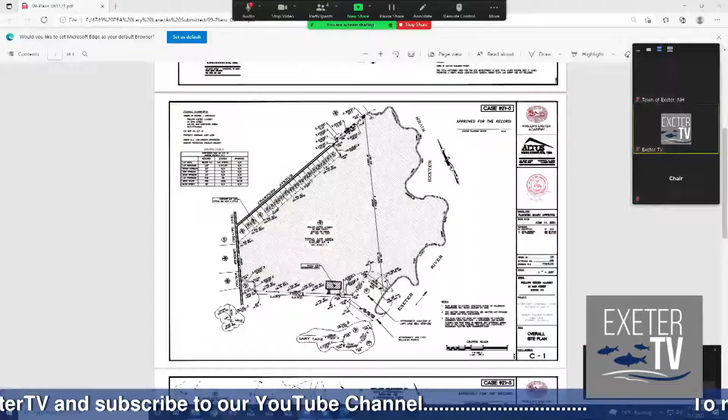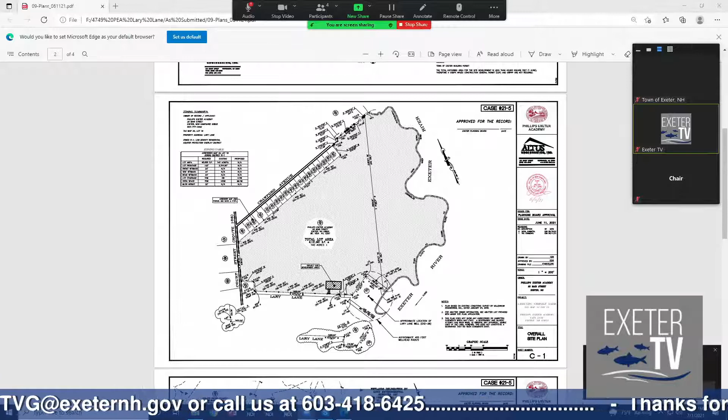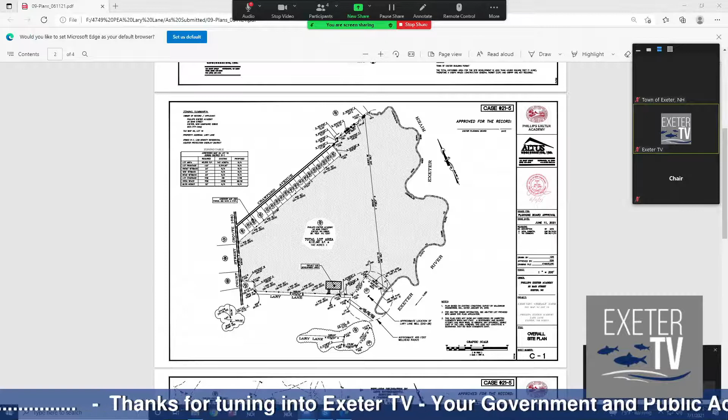Dave gave a pretty good summary of the project. This is a parcel on Lary Lane, about 140.5 acres. You can see from the map shown on the screen, it's quite a large parcel. In the southern portion of the lot, we're proposing to construct a 31,000 square foot gravel storage area for material storage to support construction activities on the Phillips Exeter Academy campus. This lot is primarily undeveloped, a wooded lot with a mixture of uplands and wetlands. The area where the gravel lot will be installed is about a 2-acre area that was selectively cleared in 2018, so it'll be constructed within that area.

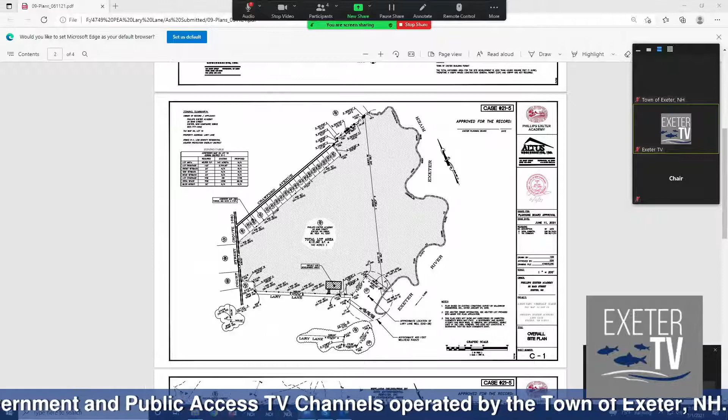The stumps are still there. Only the stumps within the footprint of the gravel lot will be removed. The remaining stumps and surrounding area will be unmaintained and left to continue to regrow, so we're only focusing on the limits within the gravel lot.

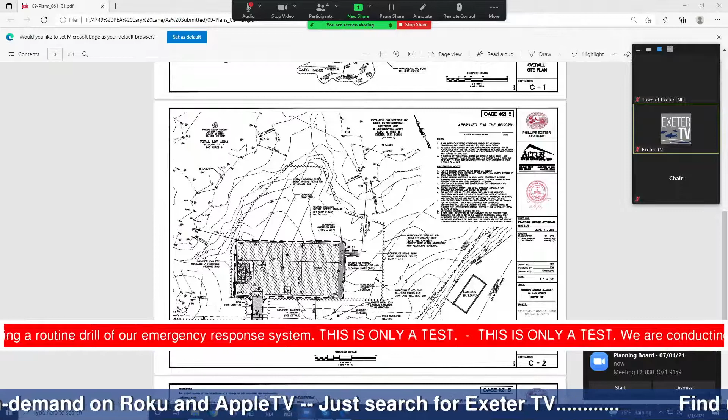Approximately 10 acres of the 140 acre lot were surveyed and wetlands mapped back in 2016. This year, just a month ago, Gove Environmental Services went back out and reconfirmed the wetlands boundaries, which was brought up at technical review. So they confirmed the wetland delineation for the project.

As you may also be aware, in 2018 there was a LOMR that was prepared for the dam removal on the Exeter River. So the floodplain in this area actually went down approximately 3 feet in elevation. So there's no floodplain within—I believe it is still on the parcel, but nowhere near the project site.

The proposed project, as we said, will be approximately 31,000 square feet. It's 0.5% of the total lot.

As a requirement for the site plan review, we did prepare a drainage analysis for the project. We'll be installing on the eastern side of the lot. The lot was designed to slope grade, high side on the west, on the left, grading to the east. We have a sediment forebay to collect any runoff for pretreatment. We'll then overflow to a level spreader and then the 150-foot undisturbed wetland buffer for treatment of the stormwater runoff.

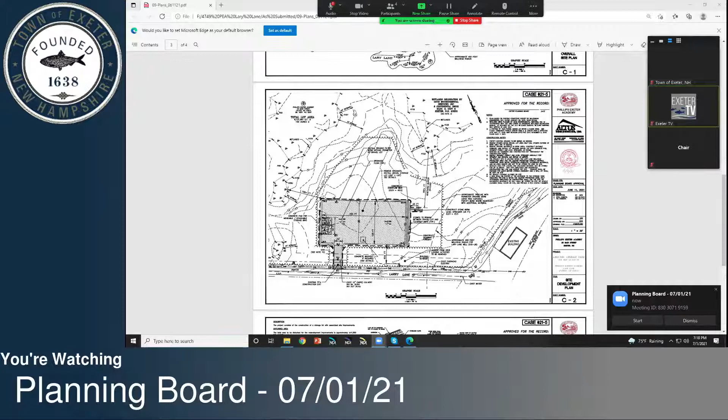And the analysis did show there's no impacts from pre to post conditions. So there's no increase in runoff as a result of the project.

We also prepared a stormwater operations and maintenance manual that was provided with the application. And as David mentioned, there's a waiver request for the performance and maintenance guarantee. I think Phillips Exeter Academy has a standing reputation within the town—they're not going to walk away from a project, so that's one of the reasons that was requested.

There have been a number of measures taken to prevent any infiltration of water that might have contamination associated with it on the storage lot. There will be some infiltration very slowly through the clay, but because it's clay and/or silt, it's going to be a very slow travel time. The stormwater management will funnel the water into a treatment area where sediment will drop out, which will also help attenuate any nutrients that might have run off with the stormwater.

There's also measures that are going to be taken on what can be stored there, and nothing that's included in the prohibited list in the Aquifer Protection District will be stored there. And that's not only listed in the report that I did, but it's in the stormwater manual. So it'll be very clear to all the folks using that storage area that those materials are not allowed to be stored there.

So in particular, no petroleum, fertilizer, herbicide, pesticide, or other hazardous materials. No vehicle repairs or other motorized equipment will be completed at the site. No de-icing chemicals or snow removed from off-site sources will be stored at the site. So that'll protect against chloride, road salt impacts, and hazardous waste impacts.

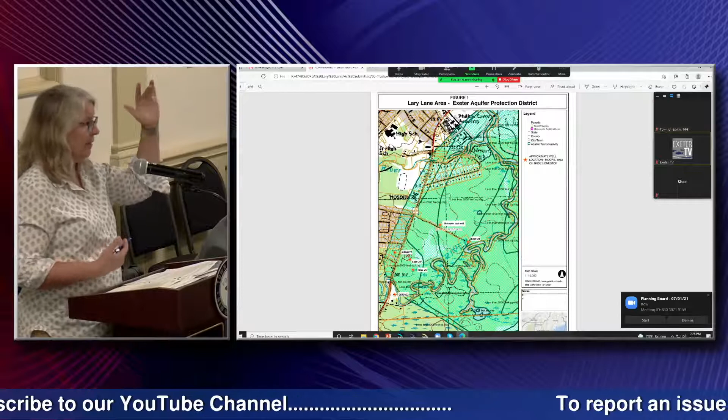So it should be clear to the users what is and is not allowed. And the other thing that I think is going to be posted is there's going to be a sign that's specific to what can be used and stored at the site. Is that still in the plan? Yes. Okay.

So, in summary, I think PEA has done a really good job of assuring that there's going to be no impact to the surface water or underlying gravel and sand resources and the water supply in the area. So I'd be happy to answer any questions. John?

Forgive my ignorance on the water system, but that well services the neighborhood? It's one of the Town of Exeter water supply wells, and so it probably services a fairly large area. Plus, there's now a water treatment plant there, so water from that well, and I believe one other, is treated there. It's basically that end of town or something that they're... I think probably best to get the water department to give you that information, but I think it's pretty well integrated throughout the area. But do you have any knowledge of that?

Yeah, it's part of the groundwater treatment plant that's at the end of Lary Lane. So there's a well there, right? And then there's a well at Gilman Park, and then there's another well actually on Academy property by the stadium, called the Stadium Well. So I believe there's three wells that come to that groundwater treatment plant and get into the water distribution system. Yeah, so I think so.

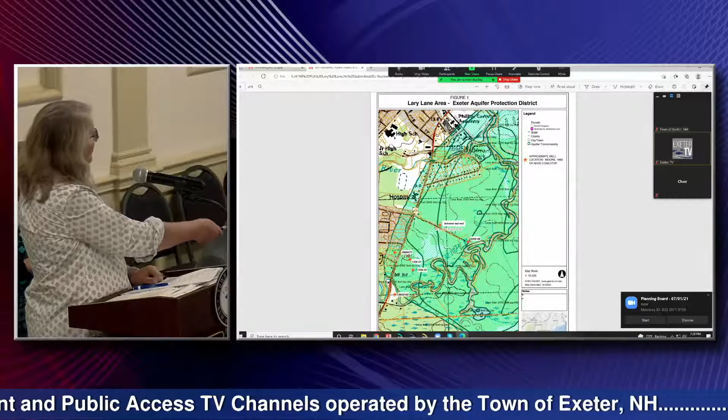It does. So if you look at the map I have up there, Exeter River is the very squiggly line there in the middle. That's the wiggly line. And then Lary Lane is right in the center of that. Thank you. Right, that's more helpful. Okay, here's our squiggly Exeter River flowing this way, and then here's Lary Lane. The Lary Lane well is here. Right, the storage area is right here.

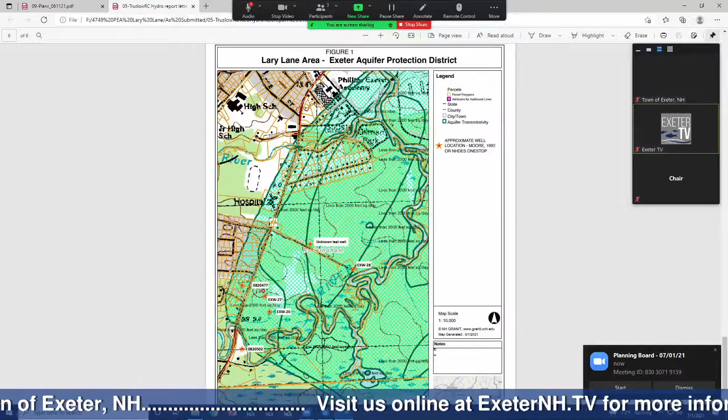The other wells that I have listed here are southwest of the Lary Lane well, and they also have that significant depth of clay. So the typical depth of clay here is going to decrease somewhat going to the southwest, but it's still going to be significant in this area surrounding the storage yard.

Does that answer your question? Well, I'll get the answer as to where the wells go from someone else.

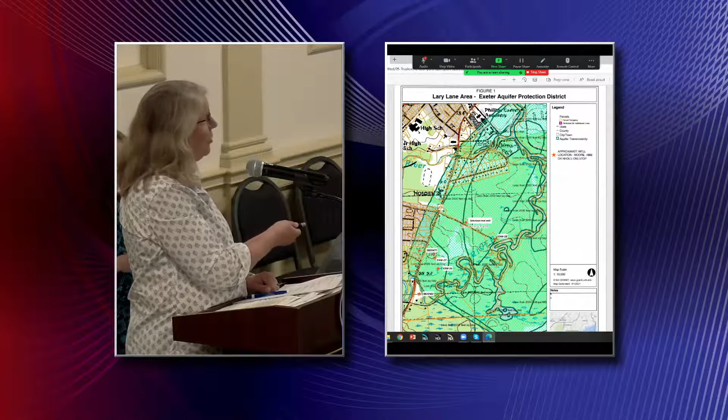I'm just curious, it sounds like we have 3 or 4 wells. So here's the Lary Lane well, and I think the stadium well is right here. That's the Gilman Park well. Stadium well's right across the river. So these all now, I believe, come to the Lary Lane water treatment plant and go through treatment for mostly metals and then distributed through the system.

I'll get the answer from the water department. I'm just curious as to how far that goes. It doesn't go to the east side of town, but it's at that neighborhood, south of the academy.

One more? Sure, go ahead. The site we said was cleared in 2018, and there's a big pile of loam there now. Is that from the field that they just stored it there?

That's actually from the construction site with the new dorm that we're building. That was transported over there, which I guess the first intent of this area would be used for that project to temporarily store that loam. That topsoil will disappear, go back to that site. So it's temporarily being stored there, but nothing was disturbed. None of the existing area was disturbed in order to stockpile that. So it's pretty clear what's cleared out where it's going to be makes sense. That's the area that we would like to develop to the gravel storage lot.

Thank you. The Academy moves a lot of soil here and there around town, when the need arises. Anybody else? Any other questions?

Pete has a question. I may have missed this, but is it proposed to monitor this site at all? In other words, once you have everything down there, will there be folks who occasionally go and see that nothing has gone awry?

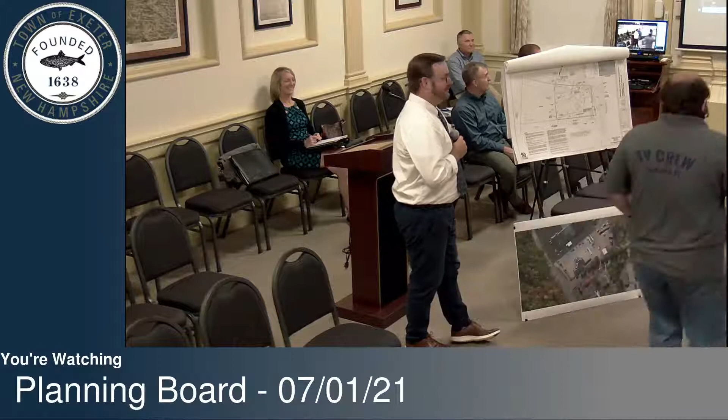So from a demolition point of view—oh, now wait. If you didn't hear me the first time, these problems with Zoom. I'm sorry, this is a test. They'll fix it. Test, test. Okay, all right, we're back.

So what you're looking at here now is the demolition plan. There's an existing fence line that runs along the property line between the two parcels, depicted by the difference in pavement color. The existing lease line for this development is really the front portion of the site, about a 78,000 square foot portion of land. We're not touching the rear, approximately 80,000 square feet. There's a chain link fence running along the south and also along the western portion, giving a good delineation of the limits of work for the development.

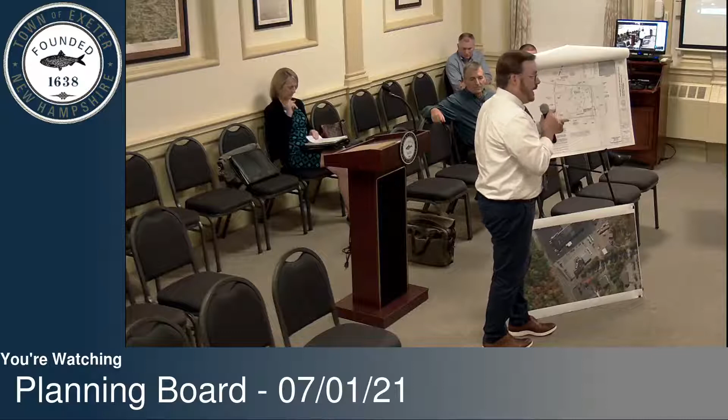Everything you see out there today will be removed—the building, all the pavement, and the curb cuts are getting reduced. All the utilities will be disconnected, and we'll try to maintain those same connection points during the proposed development where applicable.

Can I ask you real quick—can you show me where the line on the west side is? Is it right there? Yep, there's an existing fence line, barely visible on the aerial, but it's right here.

And out there today, there are actually a couple of dumpsters in the back—that's really the limits of what's out there. The firewood operation is on the other side of the fence, in the rear, and none of that firewood operation is being touched as part of this.

There were some discussions as part of the TRC regarding when that development was done and whether it needs to be included as part of this development, since it is all one lot, and whether we need to file a conditional use permit, et cetera.

Just to give a little history on that: the representative from NHDES, as well as Doug Eastman and Kristen Murphy, went out on site and determined, based on site photos, that work had actually been done back in 2008. Therefore, it's not part of this development or its phasing, which also helps with permitting for the proposed site, because it does not trigger an alteration of terrain permit with regards to the phasing of the project. If that work had been done, say, 5 years ago, we would trip that 100,000 square foot threshold and would have to file with AOT. But since it's not part of it, we do not have to file.

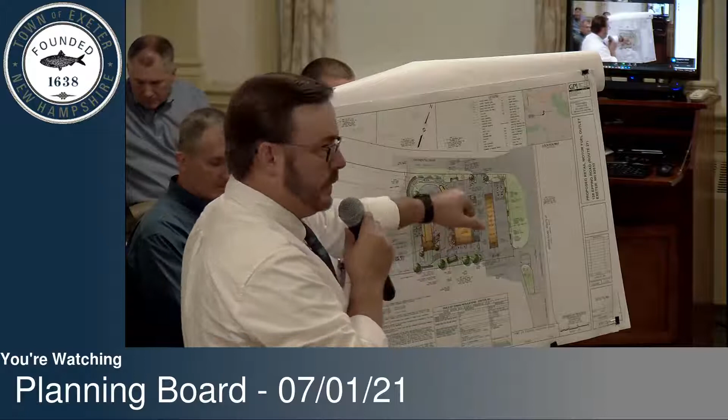We have 7 parking spaces associated with the car wash and the vacuum islands. Essentially what you do is circulate around the site, come into the car wash, and then exit out. Those 7 vacuum spaces are dedicated for the use of the car wash.

The stacking for the drive-through is a 10-car stack, and there's a 17-car stack for the car wash itself. The dumpster location is behind the building, and we have snow storage and site lighting throughout the site.

This plan represents a combination of our site plan and landscaping plan overlaid onto what we call a green and gray plan, giving an idea of the existing development, the proposed landscaping, and the site overall.

In addition to the full access curb cut along Route 27, we also have a new curb cut access, which does not exist today, on Continental Drive. It's a full access in and out, providing access to the signalized intersection at Route 27 and Continental Drive.

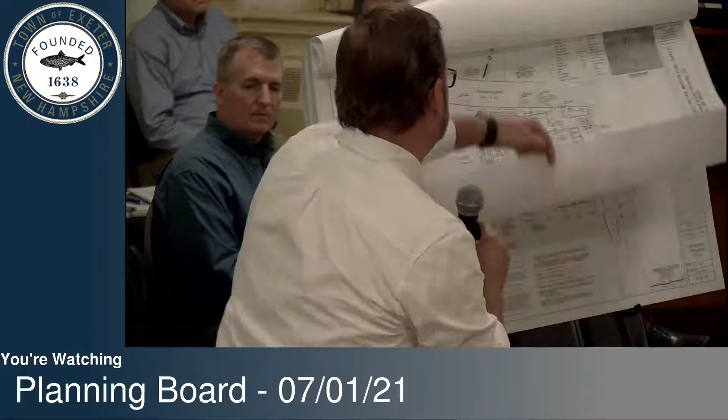From a grading and drainage perspective, we have a pretty standard closed drainage system. The site along the perimeter and the parking areas is surrounded by concrete curbing. All of the on-site stormwater is captured by deep sump hooded catch basins, discharging into First Defense Unit hydrodynamic separators,

as well as a jellyfish treatment system, located along the southwest of the site, and then connecting into the existing drainage system currently on site.

We have a small bioretention area and an underground stormwater infiltration system to promote groundwater recharge. Overall, we feel the stormwater management system far exceeds what's out there today, meets both town and state requirements, and is perfectly adequate design.

As part of the overall site grading, site grades range anywhere from 1 to 6%, with 6% being in the driveways and 1% in the flat areas along the front of the store as well as the canopy itself.

The parking along the front of the building is all flush mount, so there's no raised curb, and all the parking will have bollards along the sidewalk. It prevents tripping, and it's become more of the industry standard for gas station developments nowadays.

The car wash, convenience store, as well as the canopy all have roof drains, which are connected into the underground stormwater management system.

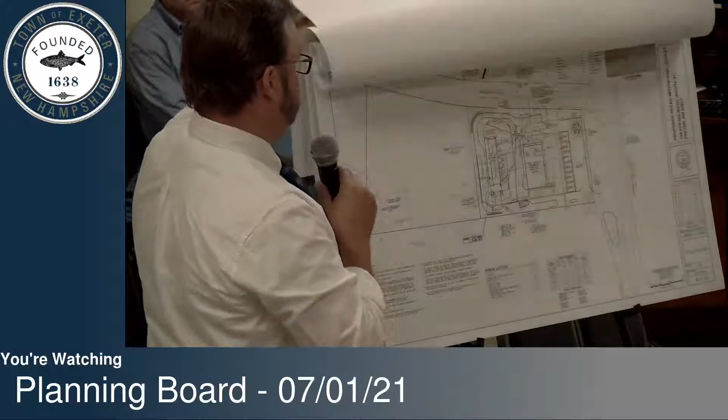From a utility plan perspective, what we're trying to do is maintain the existing connections that are out there today. The existing water line is sort of the outlier—it actually runs along the driveway in the rear, circulates around, and goes to the existing Jaguar dealership. That'll be disconnected, and there'll be a new 4-inch water line going across Continental Drive.

For stormwater and the sewer system, there'll be an external grease trap for kitchen waste, as well as a sanitary sewer line that connects into the existing sewer line running along Continental Drive. There's an existing gas line along 27 that we'll be connecting to. We have a new transformer pad located here, and the car wash system will have a reclaimed water system, which reduces the amount of water used throughout the day and lessens the load and demand on the public infrastructure.

As part of our erosion control plan, we have a standard plan like you'd like to see on any site. We have silt fence barriers along the entire lot perimeter, a temporary gravel construction entrance at the new entrance on Continental Drive to minimize vehicle tracking of dirt onto the roadway system, and soil stockpiling areas. We also have inlet protection in both the existing drainage system on 27 and any proposed drainage system on site to ensure no sediment gets into the drainage system and causes problems downstream.

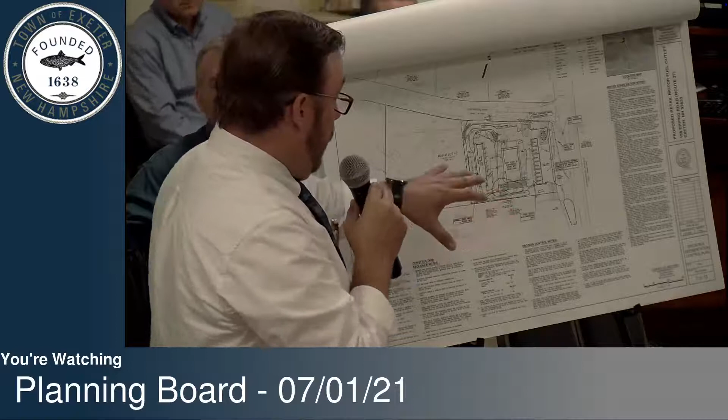When that plan is done, and we'll be submitting it back to the town very shortly, we'll show that the design calculations meet the requirements that UEI was looking for from a stormwater management perspective.

Quick question—does the water, when the car wash needs to change, go into the sanitary sewer? It all goes into the sanitary sewer, absolutely.

So now this is our landscaping plan, again overlaid onto the proposed site plan. What we typically do for all developments, especially gas stations, is ensure visibility to the canopy itself. Putting street trees or anything large in the front of the site minimizes visibility for customers coming into the site, and from a sales point of view, they want to make sure customers can see whether pumps are available without needing to drive by.

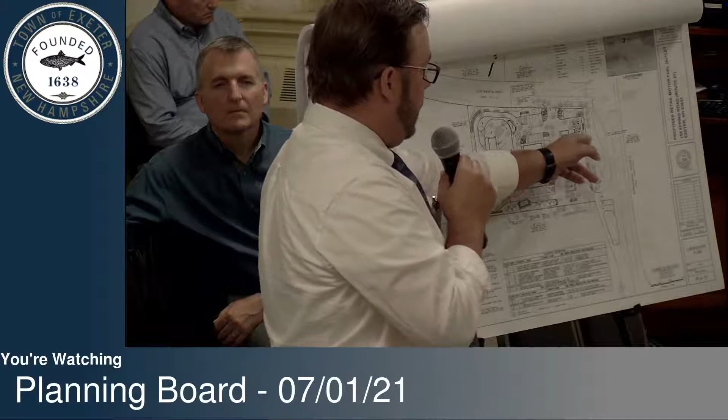So all the plantings shown in the front of the site, between the proposed pavement line and the property line, are low-growth plantings—18 inches tall, flowering daylilies, et cetera. We're proposing 10 new trees scattered throughout the site, and we're surrounding the fenced dumpster enclosure with a row of tall arborvitaes. All the landscape plantings provide a pretty substantial amount of landscaping on site.

What's out there today is really a big sea of pavement, so this is a very significant increase in visual quality for the site. Everything else in the grassed area that's not landscaped will be loamed and seeded, and there'll be an irrigation system on site to make sure everything stays in good condition.

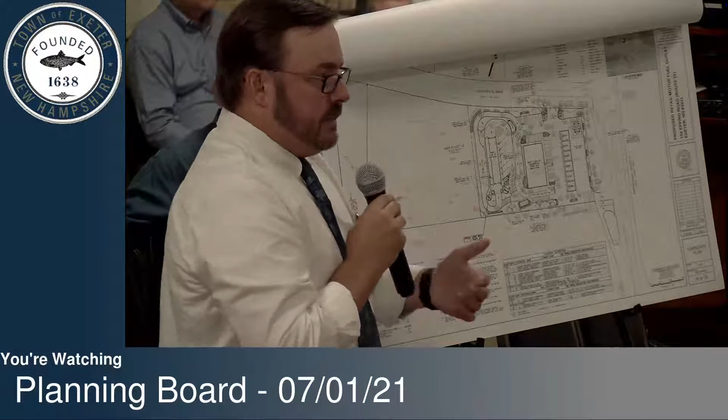In addition to making sure the landscape is in good condition, the stormwater management system also has an operation and maintenance plan. This ensures that during construction the system works correctly, and after construction too—there's a full stormwater management plan detailing how often you need to maintain the system, the catch basins, the underground systems, et cetera. It's really a foolproof way to make sure the system stays in good condition.

With that, unless the board has any questions with regards to site plans, I'll turn it over to Jim. He can talk about the architecture, and then Heather can talk about the traffic.

I would say go ahead. Can I ask a site plan question? Sure, got a site plan question. Tom.

Looking at the lot, the way it is now, looks like it's a pretty big lot, but you guys have managed to fill it up pretty tight.

If I get in line to get a cup of coffee and the line's moving slow, I have an escape. But I don't have the same thing with the car wash. So with the car wash, we actually have an exit point here. There are 2 lanes here of vehicles. Obviously I wouldn't get in that line, but that's fine. There's 17 cars in the stack, and if you've got 2 cars behind you and it's moving real slow, there's no way out. Duly noted.

Just up front, there's a bit of a road bed there. Is that an old road bed that cuts across, and you've eliminated it? Along the front of the site, the existing driveway that's out there today, you can see barely on this plan, that's all being removed. It's all going to be loamed and seeded up to our property line. Obviously, we don't want to put any landscaping within the right-of-way for future widenings, et cetera. So that's what that is.

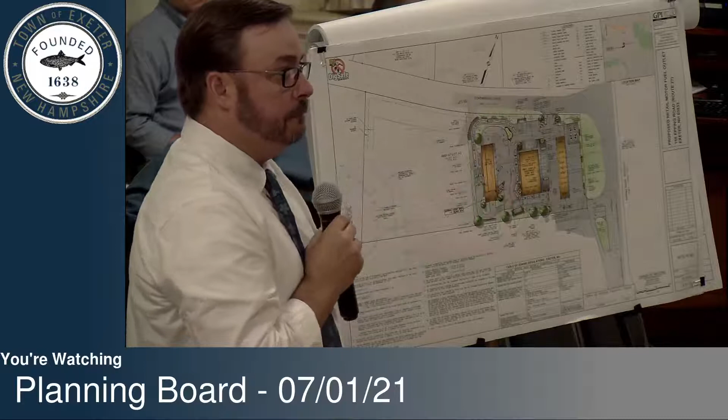Interesting. I'm sure you've done countless other projects like this, but in looking at other projects, is that more or less the average number? A 17-car backup just seems like a lot to me, and I don't go to car washes very often, but I look at them, like the one at the Mobil station—I don't think I've ever seen a queue there. And then there's one on Portsmouth Avenue where I might see a few in the spring when the cars are all salty, but I don't know.

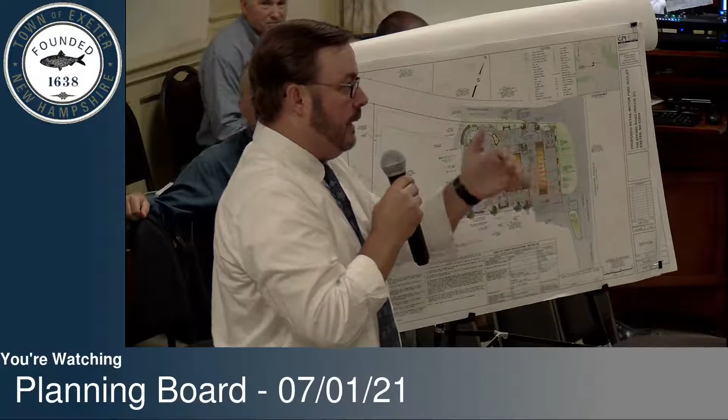What the queue does is provide the ability for a 17-car stack. Obviously on an optimum day, maybe a nice day in the middle of winter where people want to get their cars washed from all the salt, you may have that 17-car stack. On an average day—and Heather is here to talk about traffic, she may be able to answer that as well—I don't anticipate that being a constant 17-car stack consistently all the time.

Would it—I don't want to hold this up, go ahead, I know you've got other people to do presentations, but what did the previous iteration look like with the 8 to 10?

Just curious. Yeah, so I believe—and this is going months back, and I'm getting old, so my memory's not as good—we believe that the car wash was in a different configuration, and the stack started a little bit further back, so it didn't have essentially all this stacking ability here. Again, I'm going off memory from a plan 6 months ago or so. Just curious what it might have looked like.

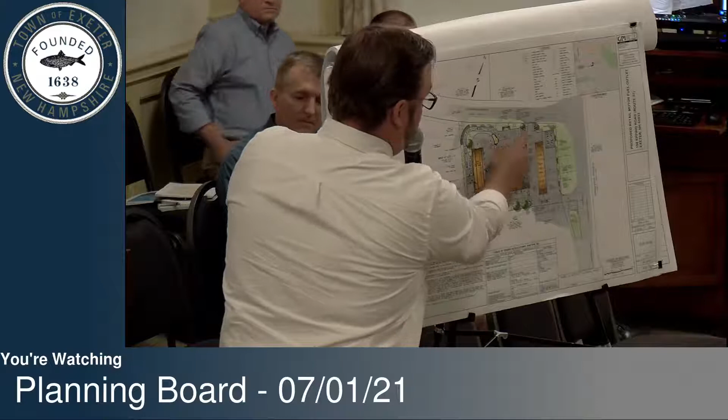Could you just take your finger and go from the driveway? How would I go to get to the car wash? So basically, whether you come in Continental or you come in Epping Road, there's a drive aisle here, and then you're accessing the drive aisle here through here, and then ultimately getting around that way, either that way or drive through. The aisles are anywhere from 24 to 30 feet wide—again, industry standard for aisle widths and lane widths.

Thank you. Other questions at this point? Okay, let's proceed. Sure, please.

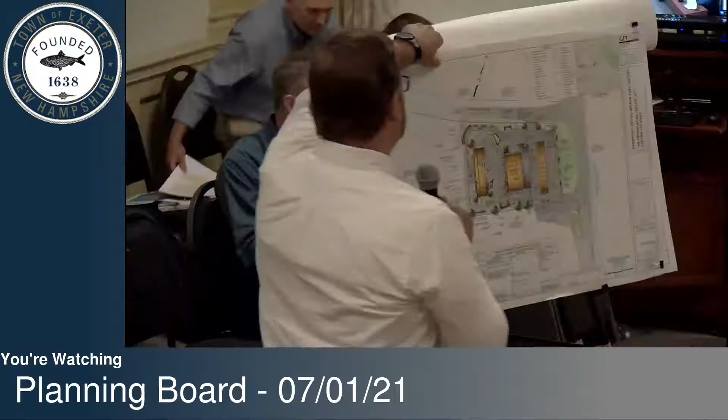I'll give you the good microphone. Okay, it's good for now.

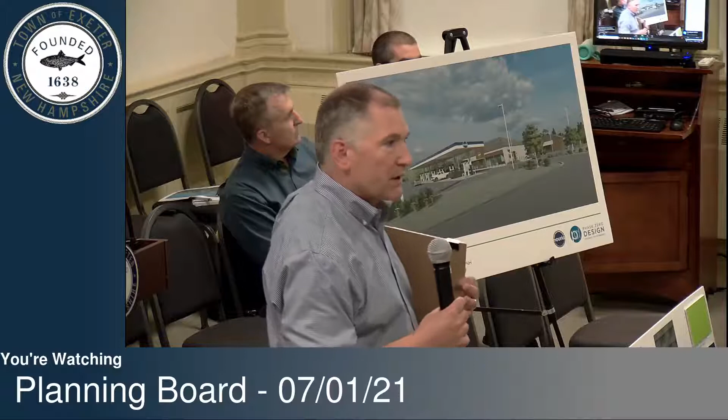The materials we chose are basically fiber cementitious board, Nichiha panels, which is a very good, long-lasting, low-maintenance system, and that's Nouria's prototype. The beige represents a stone, and at the entrance portal, that represents siding. Again, we're trying to break that down and work with the town's guidelines.

Also, when we looked at the town's guidelines, one of the comments from the town was to shield the mechanical equipment. What's nice about the hip roof is it gives us the ability to create a well in the rear, put all the rooftop equipment there, and shade it a bit with some railing, giving access for the folks who need to service the equipment but keeping it out of the eye of passersby. That would be on the back of the hip roof.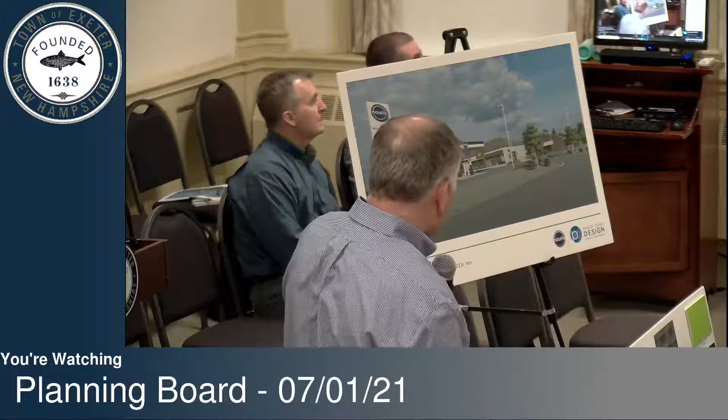As far as some of the other views of the building, let me bring this up for you. Just a little bit closer detail of the building. One of the things in the town guidelines is that you have to have 5% glazing, and we've met that as well.

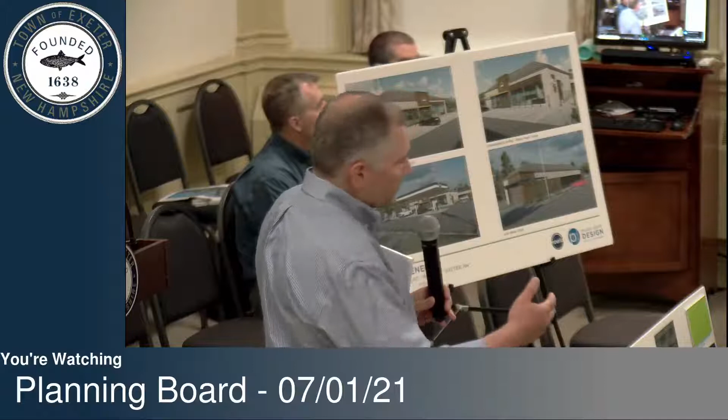What's interesting with the design of the building for Nouria, we've done a lot of work with them, and they have really well-designed, well-maintained facilities. It's something they take a lot of pride in. So some of the design elements you don't typically see in a typical convenience store, such as the ground-to-ceiling glazing on the storefront, are included. What they're trying to do is have more visibility into the store.

Typically in a C-store, and we've done a lot of them in our practice, you have metal panels at the bottom, and it looks a little bit less finished, but we're trying to elevate the design here a little bit by having details like that.

Other details we've incorporated to break up the building mass a little bit are some louvers, whether horizontal or vertically placed above the storefront. The color palette is typical Nouria design, and we feel that works well here. We've applied all of the same finishes, detail elements, and hip roof to the car wash facility, and as a matter of fact, we've put a lot of glazing in the car wash as well.

I think I've covered everything, talking about all the design guidelines, so I can confidently say we've addressed all of the guidelines that the town has in design. I'll take any questions that the board may have.

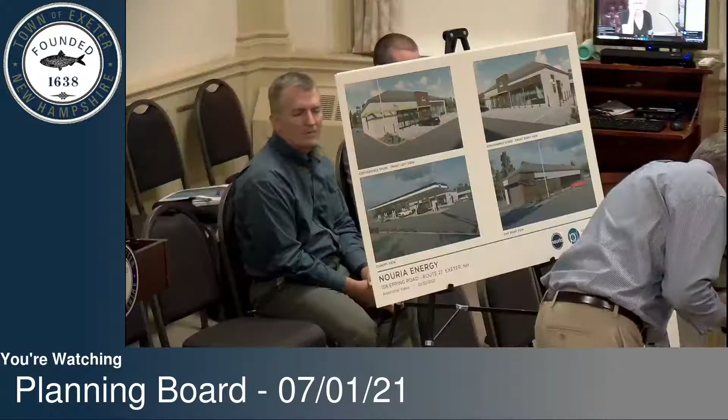And that sample on the lower left, that's what's going around the entrance door, is that correct? Yes, this is the brown Nichiha panel. Okay, and that's in the portal here.

And then on the car wash, we've addressed the corners with it as well. And the roof is black, or is it brown? That's black. Is that a sample? Yes, that's the roofing sample. So it's architectural shingles?

Yeah, things change. And this, what is this material? Is that fiber cement board? It's Nichiha, it's a cement board. It's not cheap to install, but it lasts a long time, and there's hardly any maintenance to it. So the colors hold, the material holds pretty well.

And so this is the stone, and this would be the board and batten siding kind of effect around the entry portal. Okay, thank you. You're welcome.

Can I go? Any other questions? Yeah, John, just one thing. Sure. I've never heard of Nouria Energy, is it retail under a different name? This is our brand, this is the name of the company. And where would I see one of your stations around here?

Tom, you want to let the expert answer that one? Yeah, good evening, and thank you for the question. So we're based out of Massachusetts, but we have a very large presence up in this area, actually. Most of our stores that you'd see around here have the Shell fuel brand.

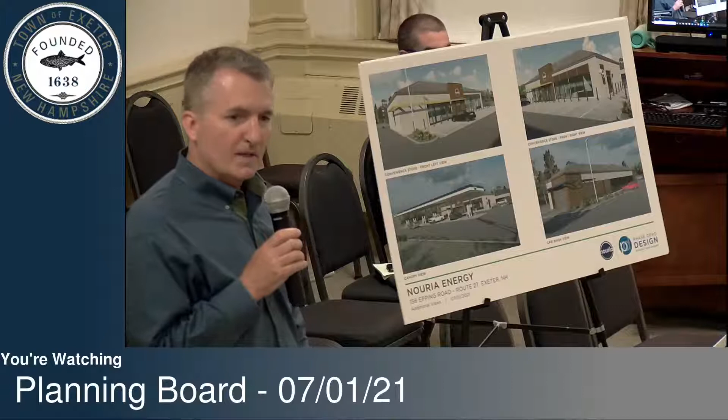Good luck. Thank you. Any other questions? That's good. No, let's move on. Well, thank you very much, appreciate it.

This will be easier. Alright, so for the record, I'm Heather Monticup with Greenman-Pedersen, same company as Chris, and not only did we do the site design for the project, but we also did the traffic. As mentioned earlier, we did prepare a full traffic impact and access study. It was dated April 20th, 2021, submitted to the town. And I'll just go over quickly what was involved in it, and you can ask me any questions.

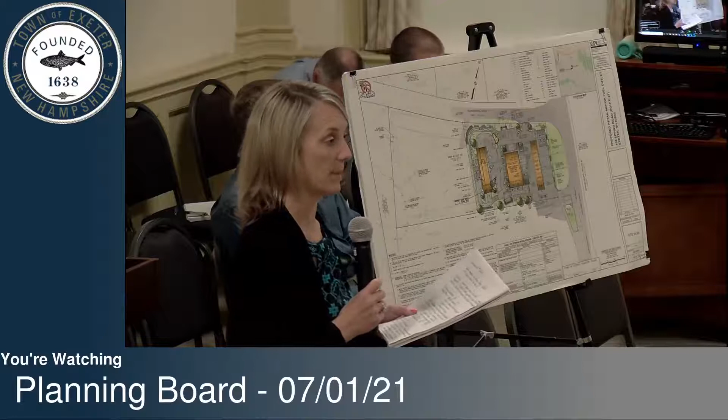So we looked at existing conditions, 2021. Our study area included the signalized intersection of Epping Road at Continental Drive. We also looked at Epping Road at Brentwood Road and Columbus Avenue, a bit further to the south. And then we looked at our site driveways, the one on Epping Road today, and also the new one on Continental in the future.

We used the information from the VHB corridor study. With COVID, any counts that we can use that have somewhat been approved are better than trying to adjust something at this point. So we moved forward with that corridor study, which had March 2020 counts in it. So that kind of was the basis of our traffic study.

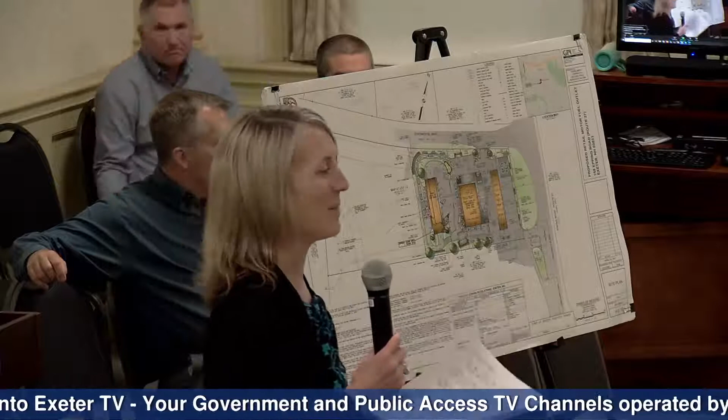We did look at collisions, we looked at speeds. We went out to 2030, which was the same year as the corridor study, used their midterm build traffic volumes. When I say midterm, the corridor study involved a bunch of things, but one were some midterm improvements and some developments in the area that were happening, and then some long-range improvements with developments that are a pipe dream right now. So we said, well, we're not going to use those volumes because we're not sure. So we went with the 2030 midterm volumes.

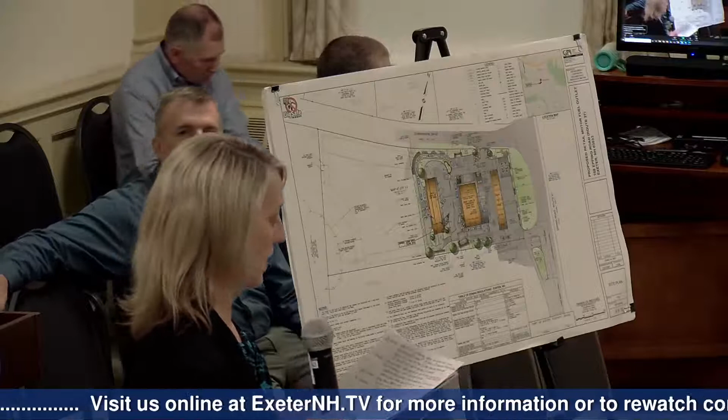It included an annual growth of 0.5%, and included a bunch of background developments in those numbers. We also looked at planned roadway improvements in the area. They're out there now doing some sidewalks on Epping Road, down Brentwood Road and whatnot. So that was taken into consideration, obviously that's in our study area. There's some improvements there at the Brentwood and Columbus going on from the Transportation Alternatives Program grant that you got. So we took that into consideration in the future year.

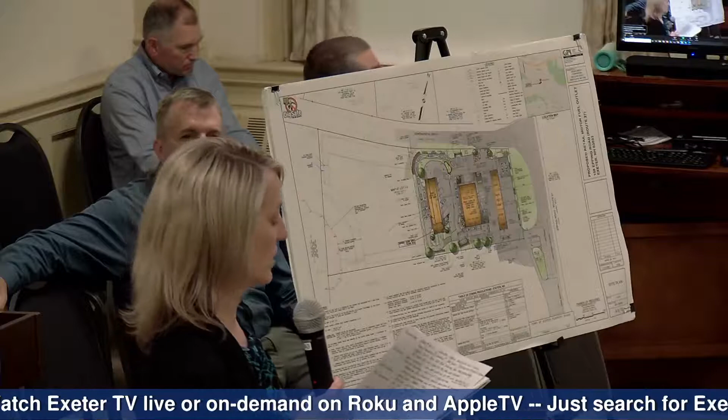Another thing we included in our future year projections for the midterm improvements was a two-way left turn lane down Epping Road. That seems viable, so for the 2030 condition, almost 10 years out, we included that in our traffic study. We did not include some of the full build-out improvements, like roundabouts to the south, because we were trying to be realistic about volumes and roadway conditions in 2030.

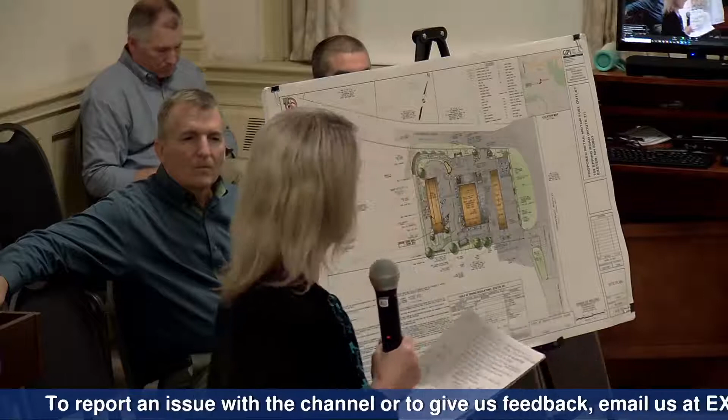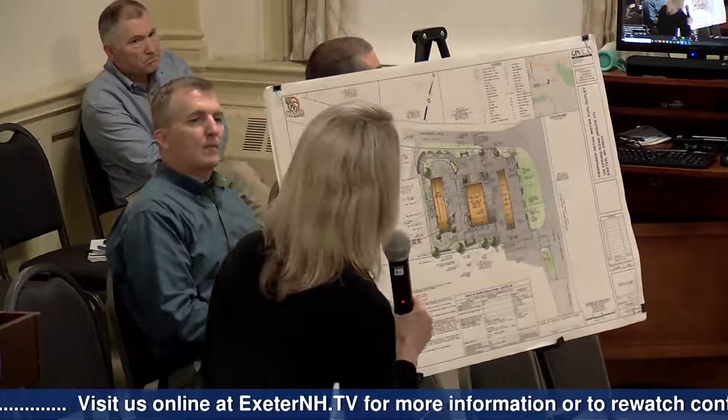As part of the proposed plan, there's no curb cut over here. Now that we've got this perspective it's a little easier - let me flip back to make sure I've got it right side up. You can see the U-turn would have brought the site in here; it's very faded on the plan, but that's what that movement would have been.

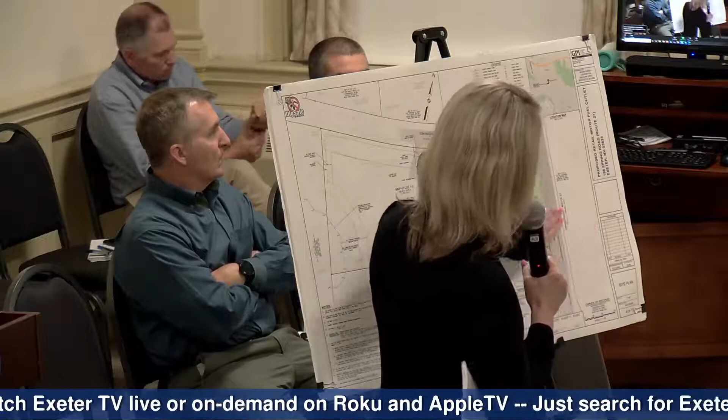So we said, let's take this wide open curb cut and bring some definition to it. It not only helps define movements into and out of the site so you don't have everyone everywhere, but it minimizes the conflict points along Epping. It's a wide open curb cut over here, so bringing some definition would be better for the site while providing access to both our site and the site to the south.

On Continental Drive, that driveway is proposed at the end of the left and right turn lanes out there today, about 115 feet back. Let me check my notes - we felt that if it was at the back of the turn lane, it's located so that vehicles can get into the turn lane they need, but also the layout provides good opportunities to drive into where the pumps are, where the convenience store is.

Also get over to the car wash. And obviously we're close to a signal, so when that light is red and queues happen, there will be queuing on the site, so we want to make sure we have area to queue those vehicles. If we moved the driveway back, or too close to this other driveway, it just doesn't work for the on-site circulation. So this was the optimal place to put it for the site while also not being in the turn lane.

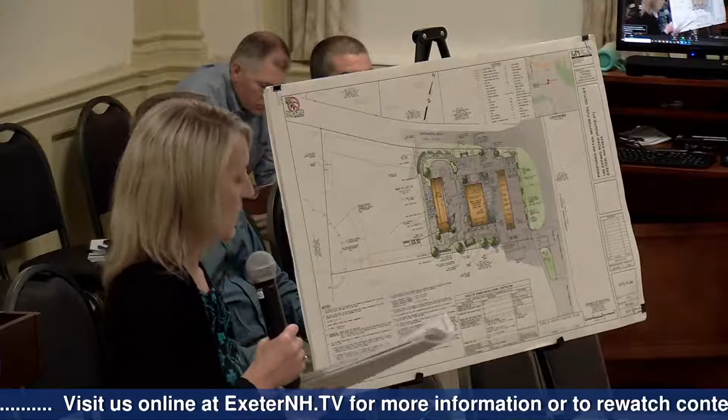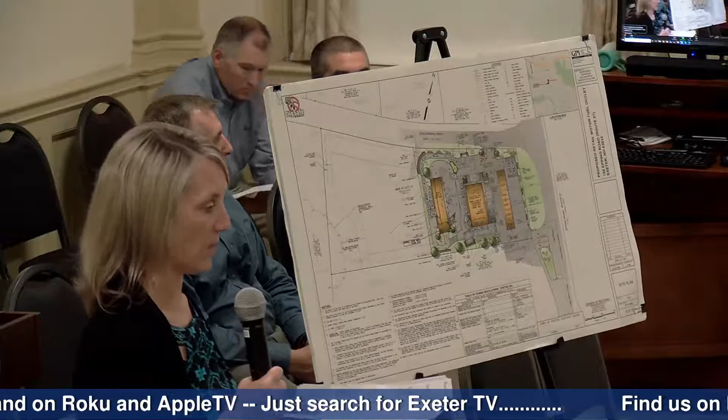So that's kind of where we were with the site access. We did look at sight distances, and trip generation for the site - it's an automobile dealership currently, not a gas station today, but it will be in the future. We took credit for that because it was an active site, but used ITE trip generation numbers from the Institute of Transportation Engineers, and as you can imagine, a site like this generates more traffic than an automobile dealership, so there's definitely going to be more traffic at the site driveways - another reason to increase the number of driveways to the site.

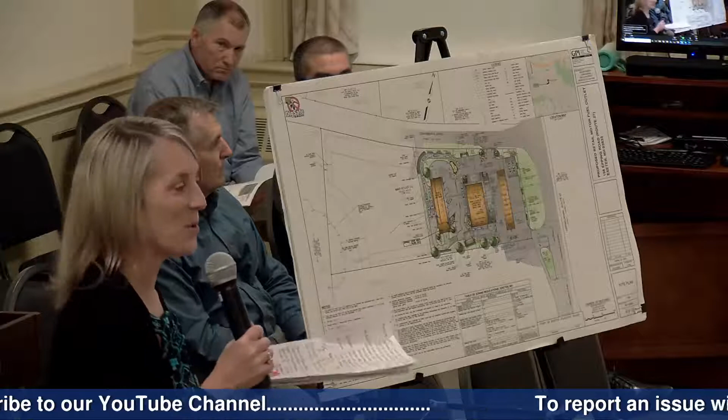But the gas station convenience store site is really not a destination site - more than half the traffic is on their way to somewhere else. We call it a pass-by trip. Sites like this like to be on busy roads because they pull traffic from the existing travel stream; they don't bring a lot of new trips to the site. Based on the methodology used in our traffic study, more than 50% of the traffic is pass-by. So although there are more trips at the driveways, new trips to the area during the AM peak hour equate to 118 new vehicle trips, and during the PM peak hour, 94 vehicle trips - that's new trips beyond the site driveways.

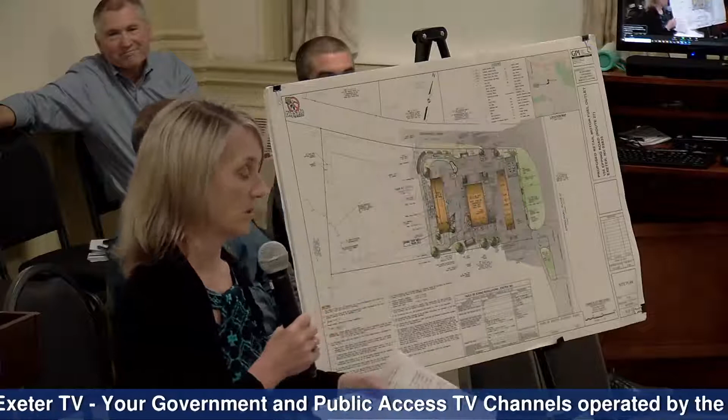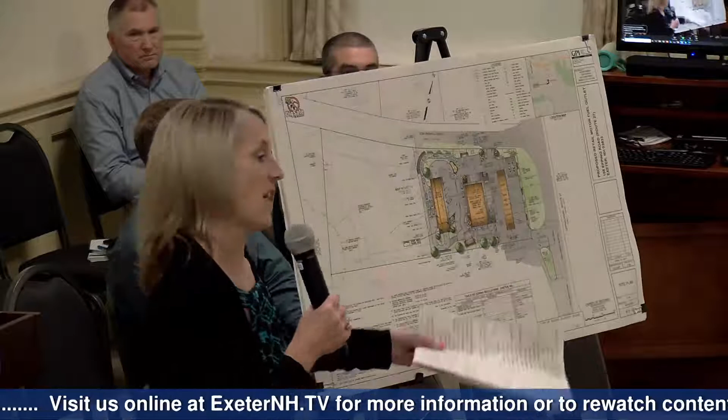Once you distribute all that traffic onto the area, we're looking at vehicle increases on the study area, to the north, to the south, beyond Brentwood Road and out Brentwood Road, of anywhere from 13 to 66 vehicle trips. That's about one new vehicle trip every 1 to 4.5 minutes, depending on the roadway. We expect more traffic to come to and from the north, about 55%, and 45% from the south, based on the traffic volumes out there.

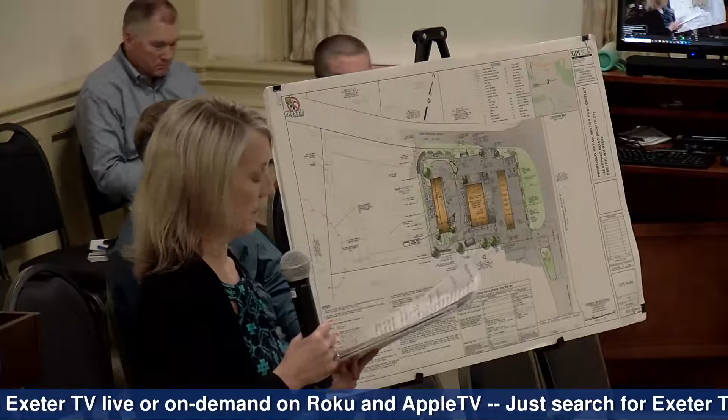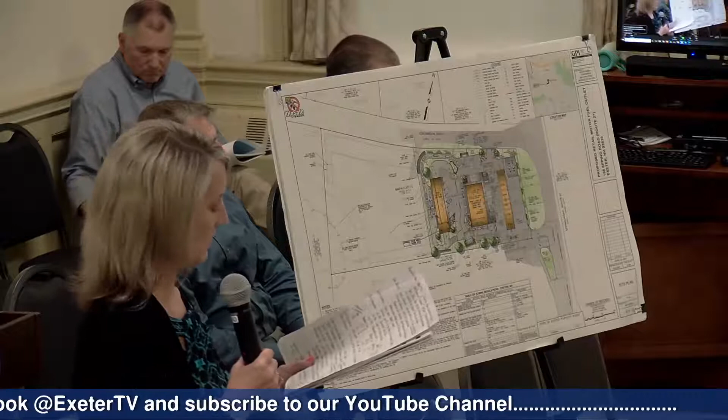We did analyze all of the intersections: minimal impact to the traffic signal, still operates at acceptable levels of service overall, A and B, with very little increase in delay to movements. All volume to capacity ratios are below 1.0 - 1.0 would be at capacity, so they're all below that. Same thing at Brentwood, Epping, Brentwood, and Columbus intersection. We add about 4 seconds of delay on any movement as a result of this project.

The site driveways, based on the analysis we've done, shows that movements in and out are level of service D out of the Epping Road left turn lane, left turn out, level of service C for the right turn out, and level of service B for the right turn in. But traffic flow on Epping Road is fine. For the Continental driveway, there's not a ton of traffic on Continental, obviously much less than Epping, so those levels of service are acceptable.

A and B, again, vehicle queuing is just expected to be one vehicle or less, but as I mentioned earlier, you have to take into account that there is a traffic signal here, so when the light is red there may be a little bit more than one car waiting. But for the amount of traffic coming by the site, there's enough gaps in traffic to get the cars out of that driveway.

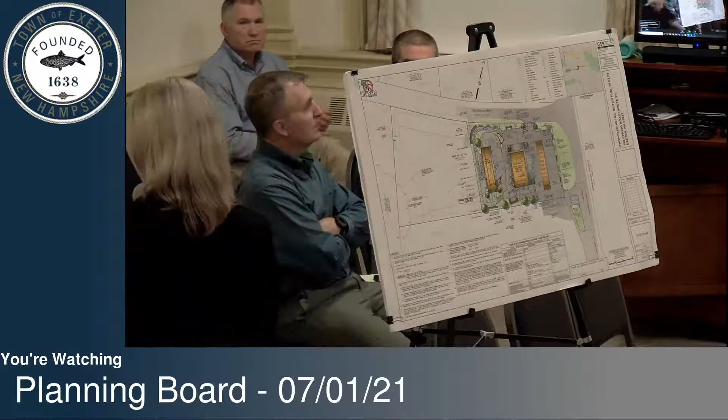In addition, we also had the TRC meeting, as mentioned earlier, on May 20th, so we do have some comments from that. VHB did prepare a comment letter, dated June 2nd. We are in the process of responding to those comments.

They had some questions about our trip generation and methodology, so we've looked at that. It actually decreases the new trips to the area with the comments that they made. So we'll be submitting that information.

They had some questions about the time periods, whether we should be looking at anything else, and because of the trip generation, whether we should be looking at more study area or intersections. From the research we've done right now, we don't feel that will be necessary, but we will respond accordingly to those comments. One of their comments was to redo the analysis without the two-way left turn lane. We will provide that analysis, and that will be fine.

They wanted us to provide our sight distance calculations - no problem, we will provide that in our response to comments. They had some questions about the truck turns throughout the site. We've already kind of looked at that and massaged that a bit so that we can address their comments.

They had some concerns about this area here as you enter Epping Road. We'd love to talk to you about that - we've got some ideas, so that's one definite reason why we're here tonight. They had the same concerns that you guys did about the car wash.

Please provide us some information about the queuing for this convenience store and the car wash. We'll provide that information. Typically we were showing all these cars so you knew it could accommodate them, but it seemed to have backfired because we're not saying that's how many cars it will be. We're just trying to ease your concerns that it can accommodate a lot of vehicles on a spring day right after a snowstorm or something. So we will provide that information.

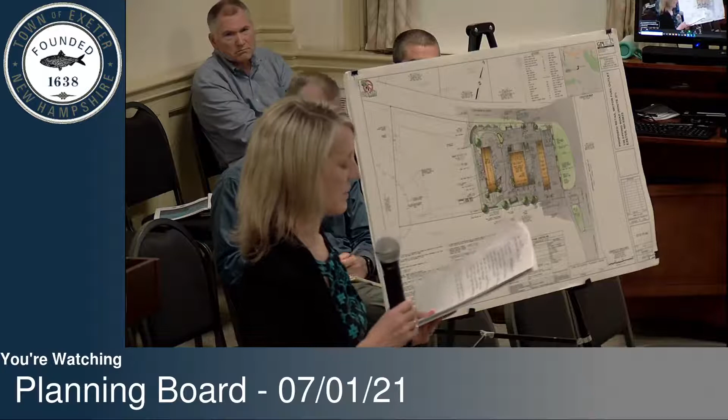Another thing left out of the traffic study was pedestrian accommodations and a write-up about off-street parking, loading, and emergency vehicle access. So we're working through all those comments now. We expect nothing insurmountable, but we expect to be able to respond to all those comments. We're really interested to hear your feedback so we can move forward and give a nice complete package back to the town.

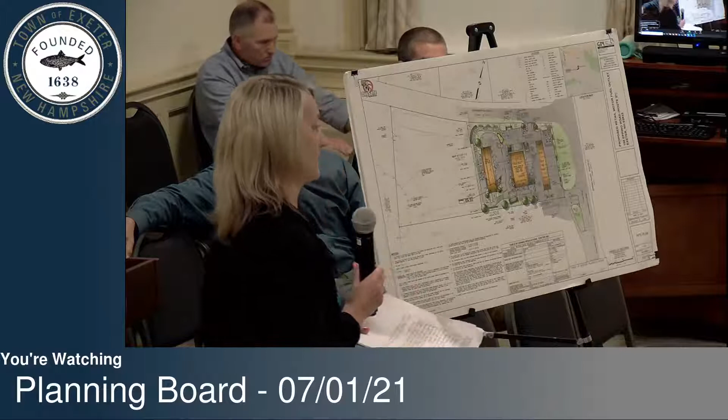Questions, John? Is the curb cut on Continental a given? They gotta get access to the site. So they have to provide it, it makes the site work, obviously, but does the town have to grant that? Well, we have to grant a curb cut to provide access. Where it is can be discussed. Okay, because you don't want it right next to the intersection.

No, I know. I'm just concerned. I'll look at it again, how far back it is, and if it's far enough back. You're questioning how far back? If it's not going to... that's in the traffic study, and we asked that question as well at the TRC.

I have a concern about the one queue, car queuing, leaving that curb cut going onto Continental. Did you say there was only a queue enough for one car? I said the analysis says there's enough gaps in traffic on Continental to only have a one-car queue leaving that driveway based on the analysis we did. We need to update that based on the VHB comments about what they want us to use for trip generation, so that may or may not change.

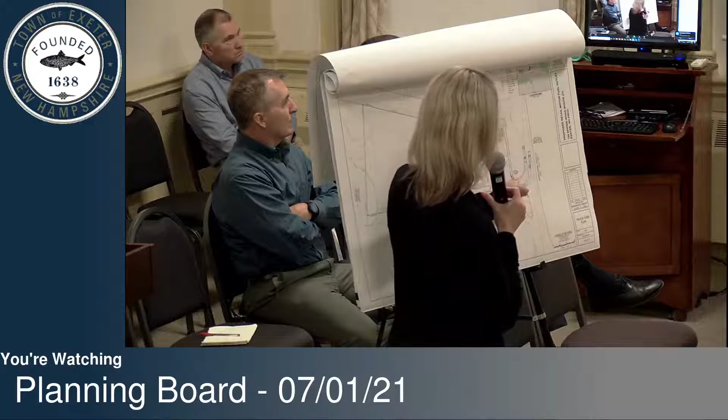This is the table area that Dave was talking about, with some tables and stuff set up there. We had proposed just some paint here on the island, but when you get out there, you'll see they've got tables and roofs and all this stuff, so we probably want to separate that a bit more. Our thought was to pull this raised island a little bit closer and angle our site traffic to the driveway a little bit closer, so we don't have cars entering and exiting through here. So we give a nice wide throat for the two-lane traffic.

They can come in, go this way through the pumps, come up this way if they need to. But also for the drive-through exit, if they come out this way, it angles them a bit towards there. It does mean shifting the driveway a little bit. There is a utility pole here, but we think that will be fine.

What it also addresses is this truck turn plan. It keeps them from having to cross the double yellow center line to come in, and we were able to fix some of the pinch points that VHB had a comment on. So we think this might be a little bit better, but if you see something glaringly wrong, we'd love that input tonight, because we want to answer as many comments as we can in this next round.

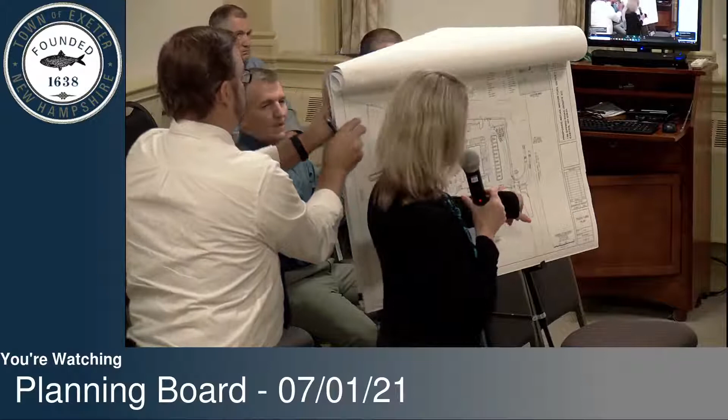Could you comment again on the little island right by - yes, this one? So this is proposed on the plans that were before you tonight. We're thinking of eliminating that. Okay, so let's eliminate that and extend this raised island out a little bit, so we give more separation and more space between the driveway.

Our site and this site as it is today - we're kind of opening it up, but with what's going on in the area over here, we don't know if that will be permanent, if they're going to have the COVID setup ending, I don't know. But we felt like if the fence is going all the way down there today, maybe this makes sense. So we like this better, we think this works better. It works good for the trucks, helps angle our people to where they need to be. So that was one of the changes we were going to do in our next submission, unless the board had any comments - Dave, first time you're seeing this too.

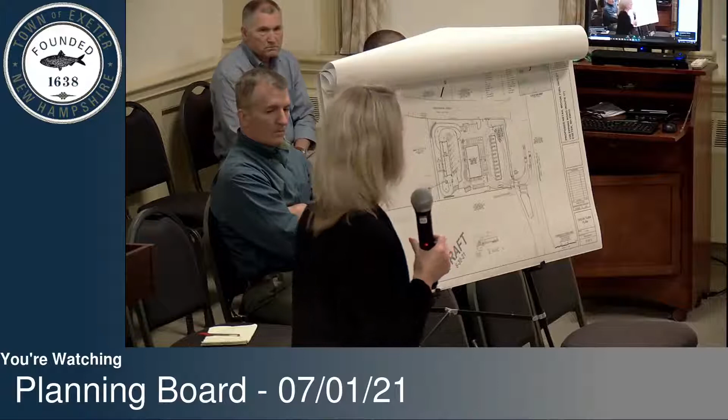Can that be vegetated up to a certain point? It can, I love the idea. Yeah, we've made it wide enough to be five feet.

As Heather mentioned, this gate is actually a sliding gate, so vehicles come in and out. This red line is where the existing fence line is right now. We'd be removing the fence but putting in a curb. It's really the same pattern, the same width. We'd be eliminating this striping, which we originally did to delineate the drive lane. This parking is no longer there, like I showed on the aerial—it's all seating now. So the actual width of this driveway is what it is today, and it's going to stay the same with this current plan.

On your truck turn plan that you have up, the area you've designated as the truck turn radius—you've got two different lines at the bottom, it's hard to distinguish. It looks like both of them kind of go into the parking, and that was also one of the points.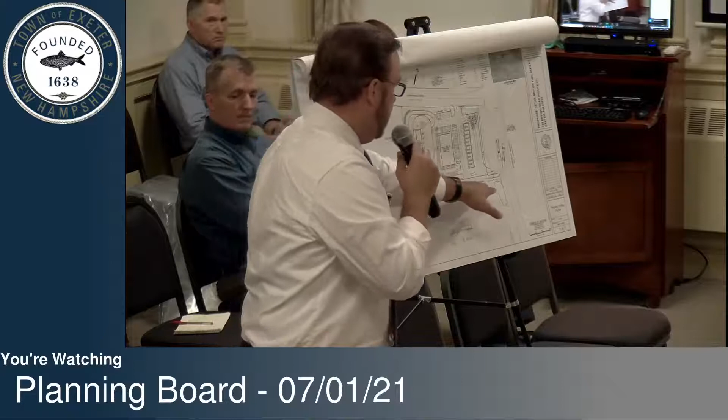So when I did my initial site walk late last year, the striping wasn't very visible, it wasn't very apparent. When we did the survey, that's when they actually located it. When we did the truck turn, we anticipated off-peak hours, so if it crossed over those parking spaces and those spaces were used for the brewery, we didn't see it being an issue.

With the current plan that we're talking about in red, that eliminates that whole concern and the whole truck turning movement. Now the truck is on this side of the property line, so it does not impact those lines. That truck turn plan is part of the original submittal; this new plan eliminates that concern.

Right, so it wasn't shown this way because that's how much the truck needed in order to get around the pumps to get to Epping Road. If you actually look at that plan, the truck could have done it in a much smaller radius—even in that plan, the truck could have made a tighter turn. If you look closely, you can see where they're starting to turn; they could actually turn a lot further into the site and take that left-hand turn without impacting that. So either way, it does work.

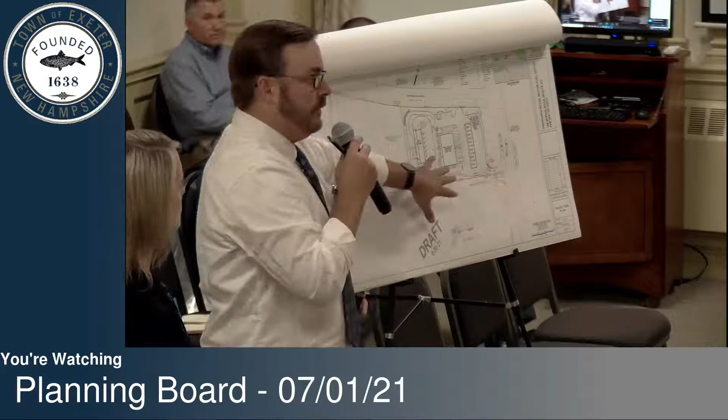We feel this is a better option at this point, and it resolves a lot of the VHB comments. That little island kind of makes it confusing—should the truck swing around it, should the truck swing one way—so that's why we thought this was clearer.

Do the trucks enter and leave from Epping Road? That is correct. Okay.

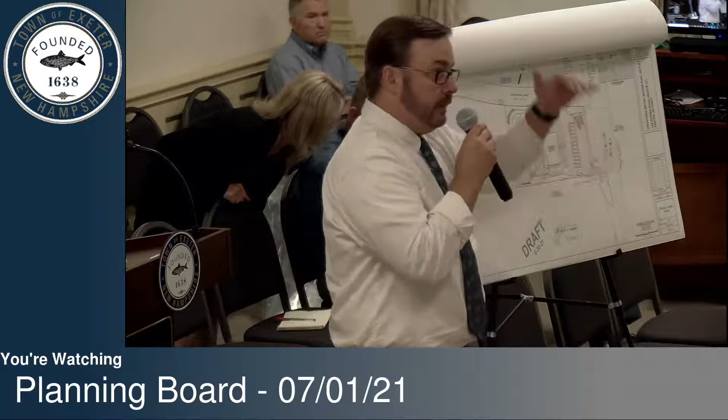He's got a tight turn to get to the other end of the pump, around the pumps. Again, the truck turn program we use is very conservative. The trucks are able to go underneath the canopy—the canopy's high enough for the truck to work. Every time we do a truck turn plan, it's conservative, and it'll work. It's just what the program is.

It's very conservative. Does it not make sense for the trucks to go out onto Continental if they need to take a left? It's sort of a serpentine movement based on the radius of the truck and the length of the cab. Right, it would not be able to make that, absolutely.

So that would be a problem if the left turn is eliminated. Right, that's for your truck. Not being the traffic expert—Heather's the traffic expert.

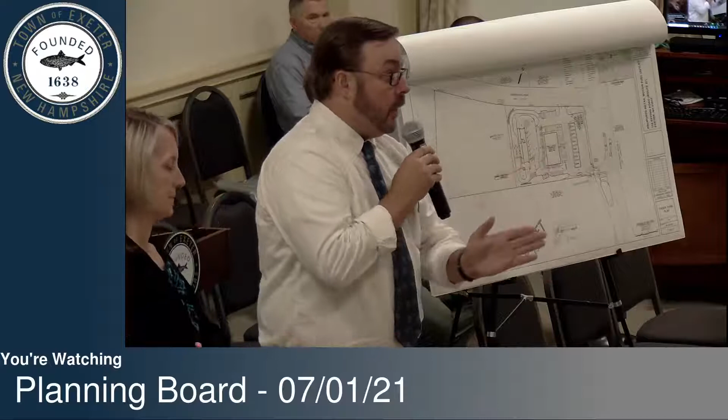When I was out there the first time, it was in the morning. I was waiting to leave the site—there was constant traffic, cars. I just found a gap in the flow and took that left-hand turn. The fact that we have the truck turn plan and the ability to dictate when the truck comes means they could make sure it arrives during off-peak hours, so the level of flow along Epping Road doesn't impact that. Additionally, my thought was, if you have the left-hand turn lane and somebody is trying to take that left, but somebody else behind them is trying to get out and take a right, having the left turn lane and the right turn lane allows the other person to go by without having to wait in traffic.

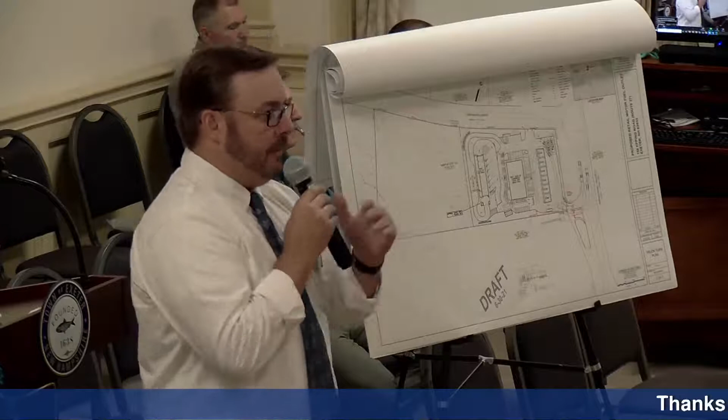But I'm not the traffic engineer either, so. Looks like a good improvement to me. Simpler.

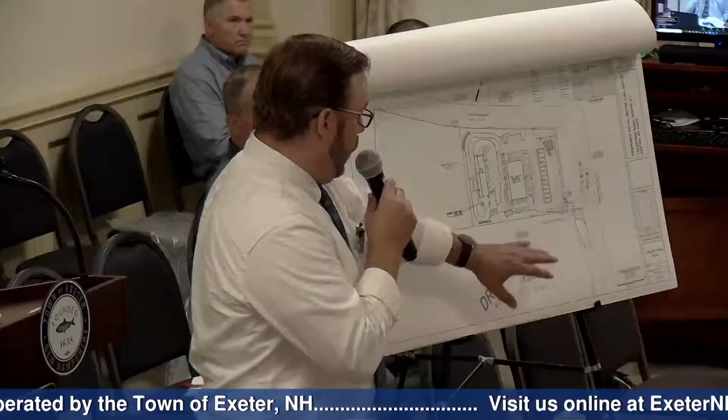And it's providing grass landscaped areas. Good.

Okay, do you need any more from the board before we decide what we're going to do? I believe we've addressed everything, unless the board wants to grant a conditional approval tonight, we'd be more than willing to take that. But other than that, it would be trying to get a site walk scheduled as soon as possible, and if the board is willing to grant a special meeting, we would appreciate that. So let's come back to the board and see what we can do.

What's the date, John, on the last Thursday of July? Yeah, it'd be the 29th. So that, and then it'll be 2 weeks again, or till the 12th, meeting in August rather than 2. But it's about the right time, and there's approximately 2 weeks between meetings. Yeah, it still keeps you 2 weeks. So there's some logic there. I don't know if it's going to amount to anything, but what date was that?

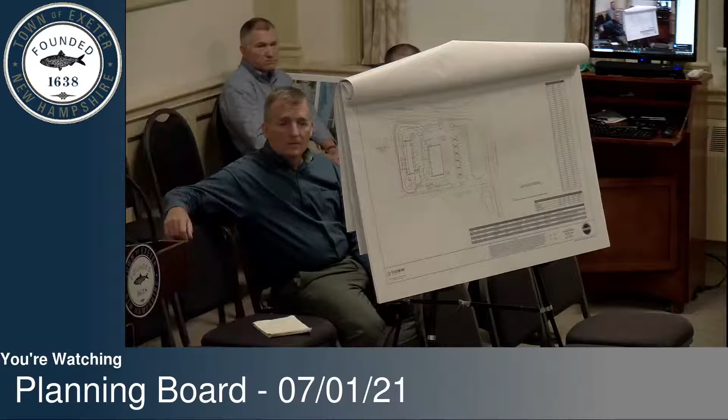If there are any lights that aren't on the buildings, I didn't see samples of any lamp posts you might have at the entrance off Continental or going out onto Epping Road. What are they called - dark sky compliant? Yep, the dark sky compliant ones. So we have light poles throughout the site.

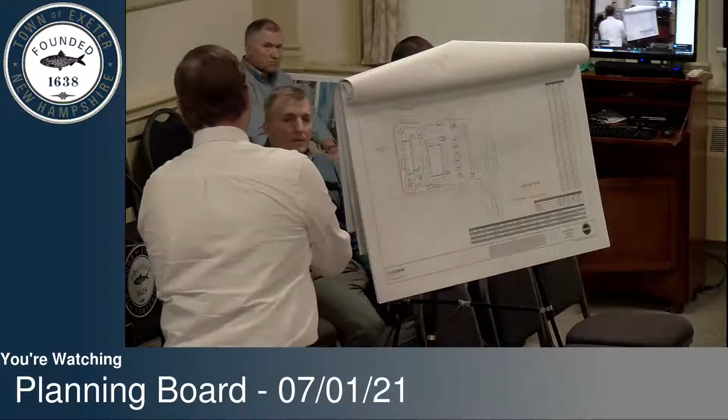Any idea of hours of operation? Mr. Chairman, that would primarily be driven by demand. We'd like to keep the option open to run a 24-hour service.

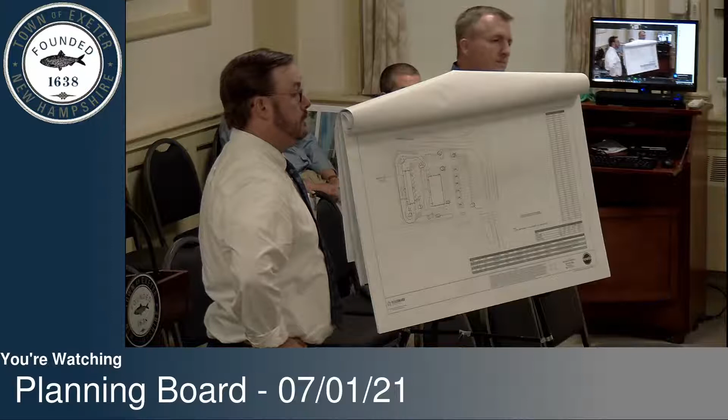Even for the car wash? Oh no, the car wash would be limited in hours - it would open probably 7 or 8 in the morning till 8 or 9 at night. We would not have the demand for the car wash overnight. So you could potentially not have just safety lights, or turn them off at 10, to try to reduce the use of lights back there as much as you can. Yes, at the time the car wash is closed, we could limit the lighting back there.

And do you have the freestanding lights - do you have a picture of what those would be? I do not have a picture, but we do have the specs on the plan. I can get a picture for the board for the next meeting. I think on your rendering there was one of the poles.

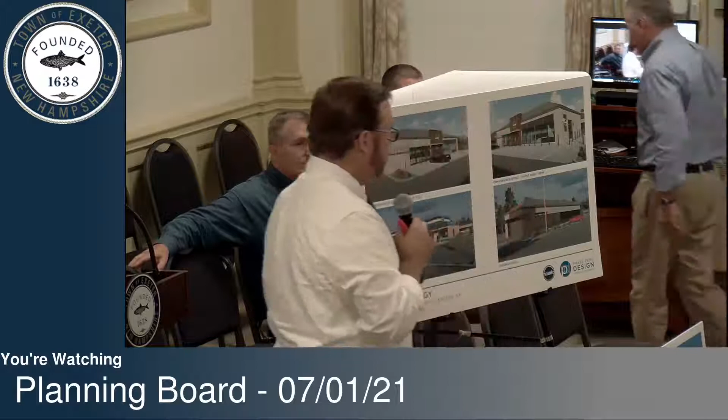Jim, do you want to show that? So that's what we're kind of showing right now - a better picture down there. Again, it's a pretty standard light for a gas station, retail motor fuel outlet. Well, they look tall, don't they? Yeah, really tall.

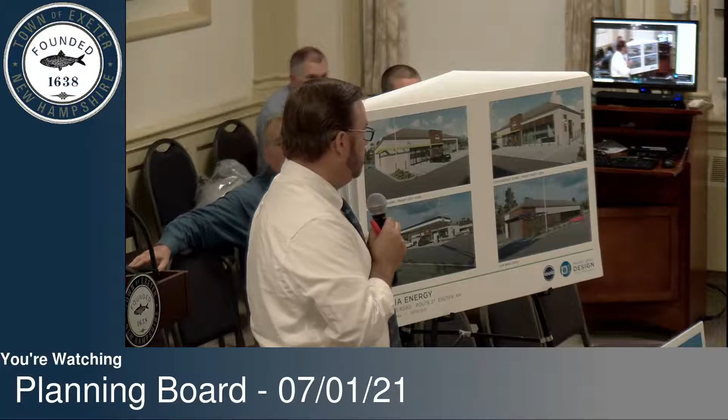How tall are those compared to the canopy? They look like they need to be that tall. So the poles are 15-foot tall poles on 2-foot bases. The canopy is about 15 feet, so that may be sort of a misrepresentation of the actual pole height.

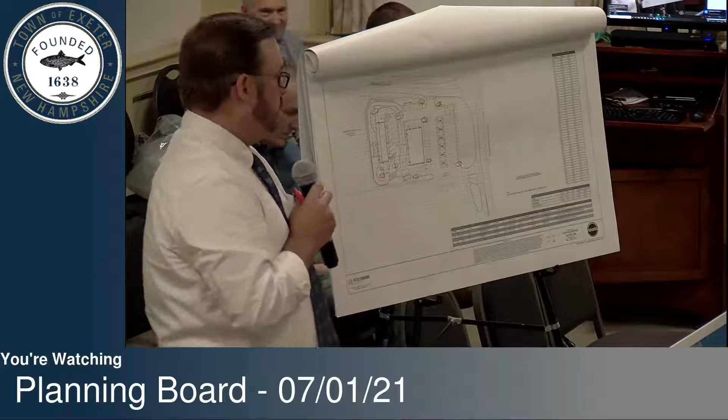Yeah, you might need to put a red blinking light on those for incoming airplanes. Condition of approval.

Okay, I need a motion to table this meeting to 7 o'clock on the 29th of July, Thursday. Mr. Nowak did a very nice job keeping the room in order while we were gone. I'll make a motion to move the application of Nouria Energy Corporation, Planning Board case number 21-4, be tabled to the 7/29/21 Planning Board meeting, and revised plans and documents shall be submitted to the planning office on or before that date, or the application may remain on the table to a future meeting.

Second? Moved and seconded. Did you set the time? Yes, 7 o'clock, normal time for the Planning Board meeting. I'll just ask for a voice vote. Those in favor, please indicate by saying aye. Aye. Opposed? Abstentions? The ayes have it.

Mr. Chairman, if I may, was there a comment on when the plans need to be submitted? Did I hear that correctly? If the revisions aren't submitted, then it doesn't get tabled further. I thought somebody had said a date. It says here revised plans and documents shall be submitted to the planning office on or before - the date would be the 29th. Right. So the application may remain tabled. They'll be well before that. Well, if they're not, we don't talk about it. Good question, though. Thank you very much, we appreciate your time.